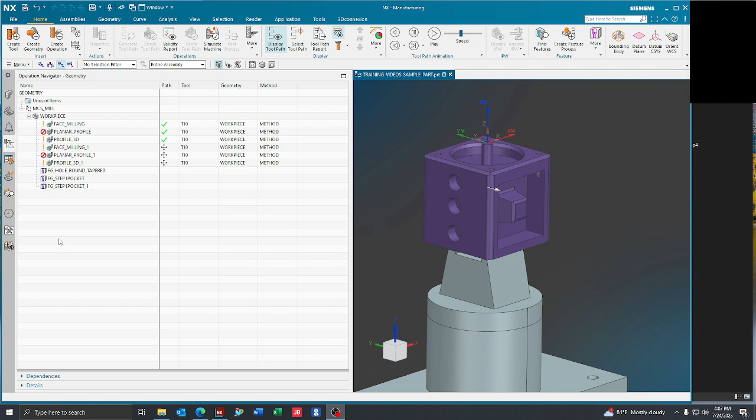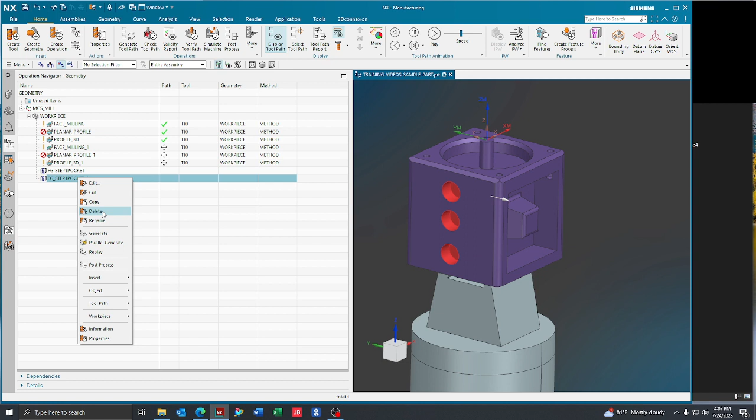In this instance, we found one hole on the top here, 4 on the top there, and then 3 on the side. So this one on the top, we're going to go ahead and delete that because we're not going to worry about drilling that hole. These 3 on the side, they're 3/4 with a flat bottom. We're not going to worry about those either. We'll probably ramp them or hole mill them with an end mill. So we'll delete those. So we're left with this one section.

Now you might have a part that has a dozen different hole sizes. So you'd have a bunch of these left over. A good habit is to hover over the wording here, and then it's going to tell you your diameter, which you'll see is 250. So I like to take this and type in 250.

Now, the reason I did not put a point in front of that is NX does not like decimals in names, and you'll see it's going to give me an error. So I'm going to name that 250 for 0.250 diameter holes. Since this group is under my workpiece with my MCS, I can program with it.

So we'll go ahead back to the program order view, and I'm going to say create operation. I'm going to go ahead to hole making, and I will select the hole drilling with my 1/4" drill here. And for the program folder, I'm going to put it in my op1. But for geometry, I'm going to select my 250 that you see here now for my 1/4" holes.

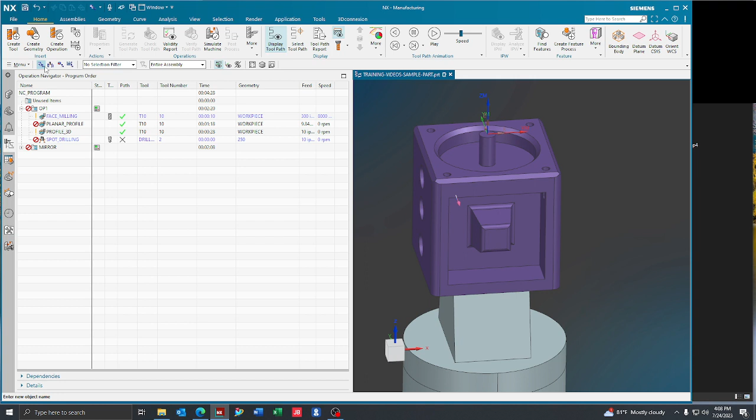If I go ahead and say OK, and I'm just going to quickly go ahead and say OK again, we can then pop back to our geometry view, and you can see that the toolpath is underneath that 1/4" hole group. Going back to our programming view, we can double click on the toolpath to open it up, and then if we click specify feature geometry, you can see that it already has those holes selected.

So then we can actually go ahead and just hit generate, and you can see that there's the holes drilled. Now the depth is not correct, but we remember that it was a 0.1" depth, so we can say specify feature geometry again. At the top here, use our predefined depth. We can make that 0.1".

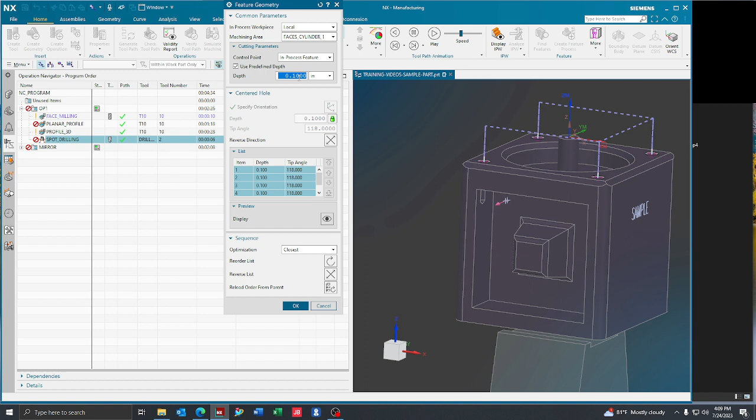It's going to change our depth right here to all be exactly the same 0.1". And then we can say OK and drill again, and then say OK. And now, very quickly, without having to select any holes, you can see that you have drilled your 4 1/4" holes that you found.